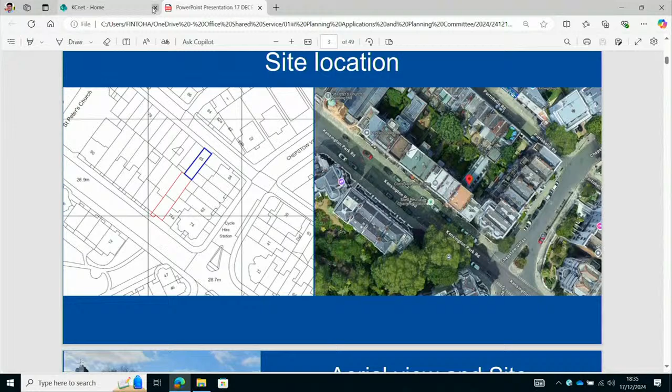So the application site contains a Victorian terrace building set on the northeastern side of the street. The site contains a large rear extension that covers the entirety of the former garden and is linked internally to number 65 Portobello Road to the east. The ground and lower ground floor were in use as a former antiques arcade, and I'll touch on a bit about the proposed use later in the slides.

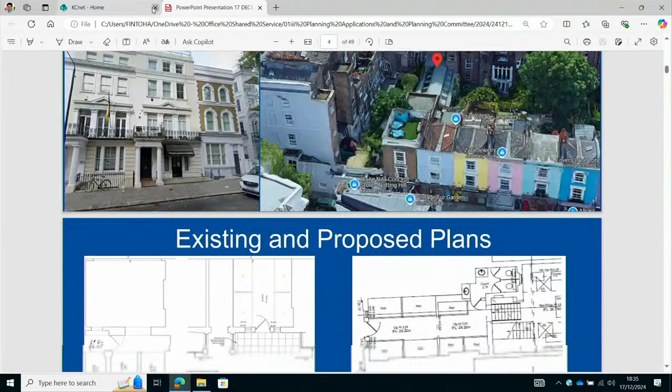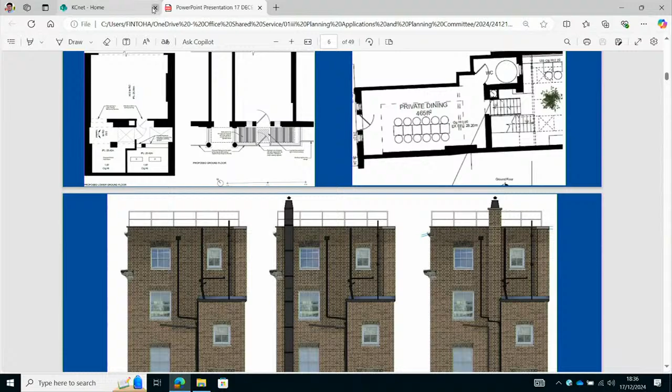Planning permission is sought in this case for external alterations comprising the removal of hard standing, which currently conceals the front light well, and its replacement with pavement lights and walk-on metal grills. Also proposed is the installation of air conditioning units and equipment featuring acoustic louvres, and the installation of a kitchen extract and flue set within a brick slips clad enclosure.

The proposed works are required as part of the conversion of the premises to a restaurant. This change of use would not require planning permission and is not part of the current proposals.

It is noted that the previous application for the site was refused, and dismissed at appeal. The main reasons for the refusal relate to the design and appearance of the rear flue. This slide provides a comparison of the existing, refused, and now currently proposed rear elevation.

The officer has concluded that the proposals have now overcome the previous reasons for refusal related to design, and would continue to preserve the character, appearance, and significance of the wider conservation area. The officer has also concluded that the proposed development will continue to ensure good living conditions for occupiers of neighbouring dwellings. This concludes my presentation, and I'll be happy to take questions in due course.

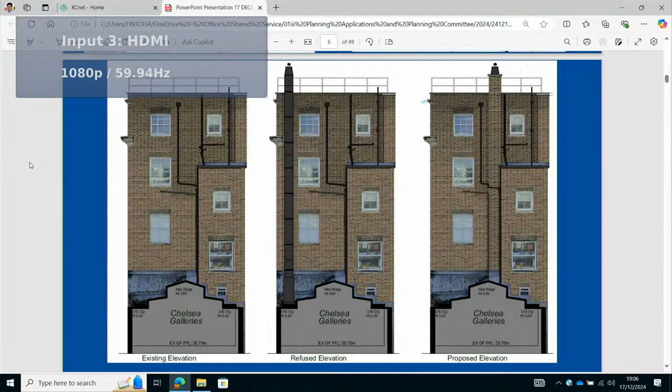Just to confirm, are you referring to this image? No, there's a photograph, it's on the page where those three images are in our packs, not the presentation. It's labelled as photo of existing rear facade. Bear with me a minute while I find that. There aren't any page numbers. If you go on to your first or second slide in the presentation, second slide.

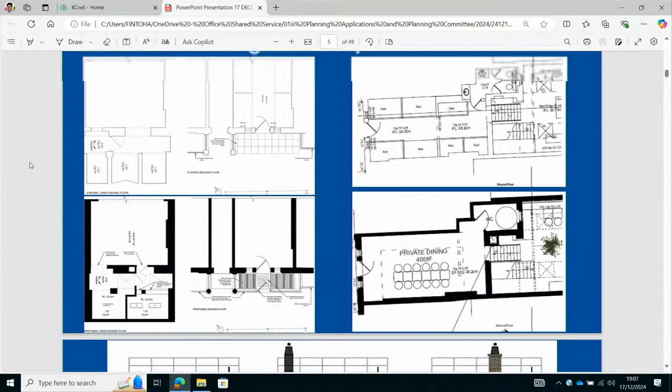Is that the top photo, top left? Yeah. So I draw your attention to the chimney stack on the building to the left, which is painted white on the front, but the right-hand side is probably original brick. Then the set back one, halfway along inward from the butterfly roof, would be the existing chimney stack with terracotta pots on top.

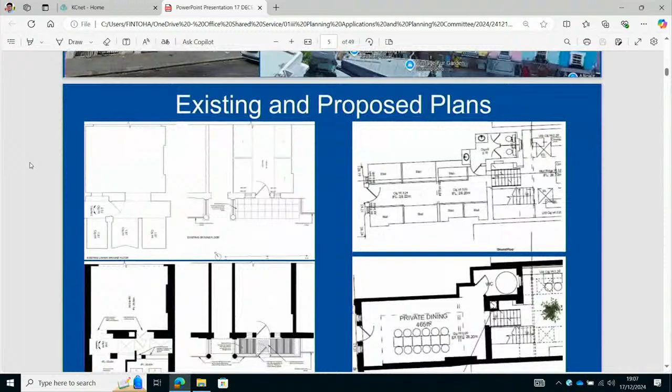I'm just wondering about the height, because we've heard from the objectors that it's higher than the existing original ones. Well, looking at that image now, you can see the railings sit slightly below the top of the chimney pots. If I refer back to the rear elevation, this would also sit just above the railings. So based on that, it looks comparable. Again, I don't have exact dimensions, but it does look comparable to me in terms of height.

And this one here? Yeah, that was my understanding. Thank you. Sure, no problem.

And then you asked about impact on the conservation area. Yes, please. A few important points have been made already around the differences in the previously refused scheme and the currently proposed one. While I still have this image up, you can see the middle elevation is the refused scheme, which has the exposed flue located on the left of the building when looking from the rear, whereas the current proposal proposes the exact same equipment, the only difference being it's encased in brick slips. The reason for encasing in brick slips, as mentioned already, was to help disguise the flue to some degree and allow it to harmonise better than the previously refused proposal did, which made no attempt to harmonise with the surroundings.

It's also important to note that was the only reason for refusal in the inspector's decision, which is a material consideration in this case. So it's for members to decide whether or not they agree that the efforts made to conceal the flue are sufficient to overcome the previous reason for refusal, as the officer has recommended.

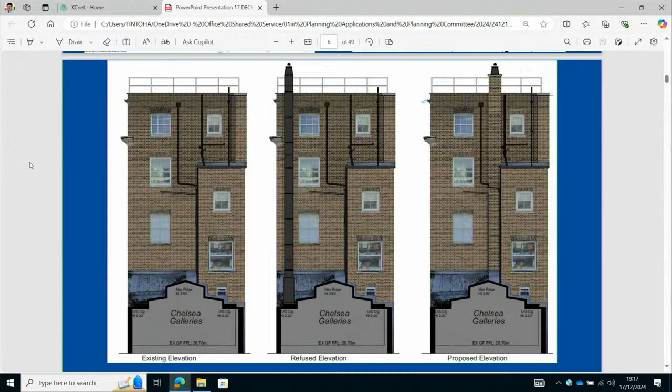Right, in which case we move to a decision. I'm just going to do a show of hands. The recommendation with the change to condition 8 is to grant. Can I see all those in favour? All those against? So that's 3 against, 2 in favour.

So, thank you. Planning permission is not granted.

We need to, could we propose a reason? One of the officers propose a reason. I'd just suggest maybe the same reason as previously, which was considered by the inspector, for consistency. I would say, Chair, that we're opening a can of worms if we let this one through. They're going to get worse and worse and bigger and taller, and covering something with bricks which isn't going to match the original bricks.

Could you propose a reason? So, not in keeping - visually not in keeping. Is that good enough? Yes. Okay, could I have a seconder?

So can I have a vote on that as a reason? Could I see all those in favour? All those against? And I'll abstain on that, so that's passed, 4 in favour. So thank you very much to everyone who joined us for that case.

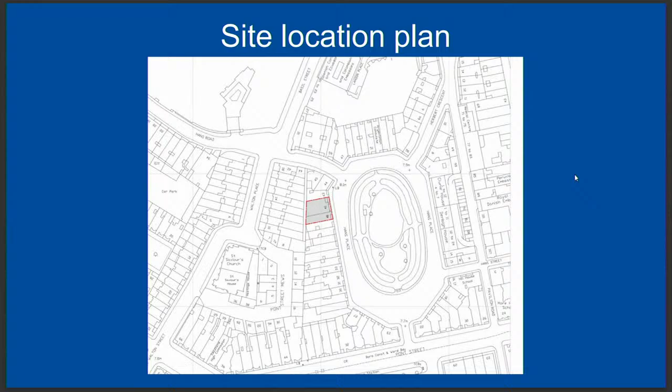Before you is a site location plan showing the 2 properties in question. They front onto Hans Place and have rear elevations towards the properties that back onto Walton Place. Here are some photos of the site. On the left you can see 40 Hans Place and on the right 41 Hans Place.

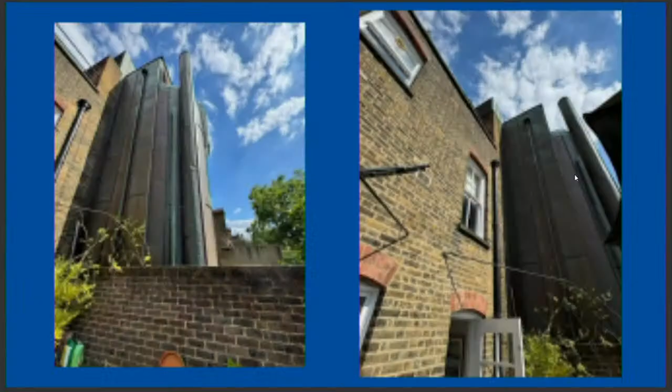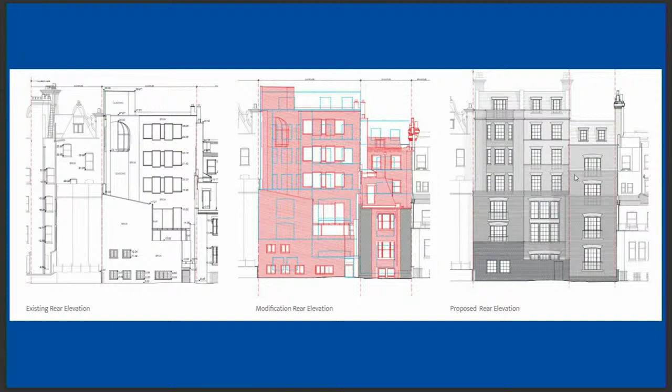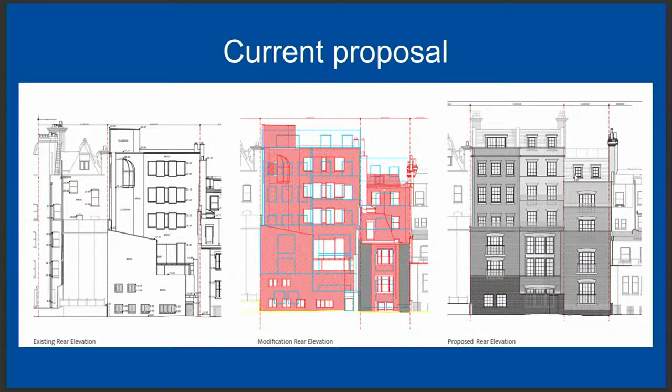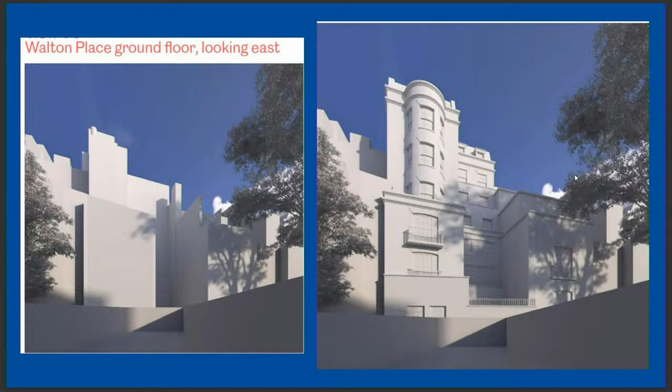These are some visuals of the proposed alterations. You can see that the large extension to the rear is apparent within the gap between the 2 buildings. These are some CGI images demonstrating the rear of the property. And this is the current proposal showing the minor alterations to the scheme, which show a more curved rear elevation on the left-hand side of this CGI image, sought to overcome some overshadowing and overbearing impacts to the neighbouring property.

It's pertinent for the committee members to understand that a previous application was refused by committee on the 10th of September for 6 reasons. Substantial weight has been attached to this recent decision as a material consideration when determining this application, as recommended by officers. The new application was received shortly after, on the 7th of October, and the revised scheme sought to respond to the reasons for refusal.

All of the reasons for refusal are set out in the officer's report within your pack. However, very briefly, to overcome the concerns raised, a payment in lieu of £1,051,635 is to be secured towards affordable housing due to the substantial demolition proposed, which is required to satisfy policy regarding community housing. This is to be secured by a legal agreement.

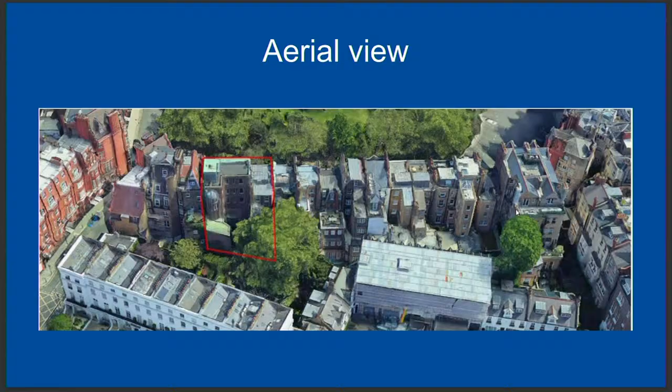And which floor are you on? I'm on the third, fourth, and fifth floors. Third out of five. Yes, that's correct. So, I mean, at the moment, there is a stairwell, a copper stairwell, which is the extent of it—that's about 2.75, I'm looking at. There was a slide taken from the roof terrace showing the rear elevation—there we are, right? Okay, so that's me. Right, and that copper stairwell is the extent of the rear of the property at 41/40.

And that's my back door, and that's the roof. That's the brick wall, and that's it. Now so I can look out across quite an extensive vista, some nice trees, all this sort of stuff that sits there.

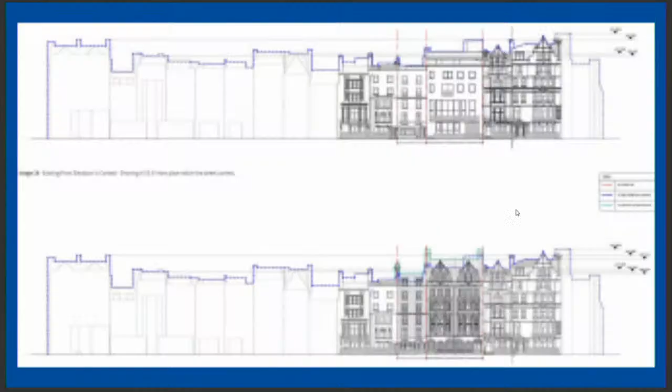The idea is, beneath me, there is no extension. The property is extended only out, I think, to the second floor. So it's one floor below me. The idea is that above that, there'll be another 4 stories, which will go up. I think it is marginally higher, perhaps the same, but marginally higher than the existing copper stair tower.

But it will come out. I think it comes out a couple of metres from where I have just now. So I go from - what did I say it was? The existing building line, I think, is 2.75 metres. I think it then goes to 5.75. The revised scheme is now 5.25 metres. So what I currently enjoy just now is quite significant and goes down, I think, to about 18 inches or something. So it's actually quite small.

But that really is the crux of my point. So sorry, the 5.25 metres - that's how much it's going to extend out beyond your building? Yes, at the moment it goes out. The building line, I think, is 2.75 metres. The refused scheme went to 5.75 metres. The revised scheme here is 5.25 metres. So it goes out a little under 3 metres from what I have just now. Okay, I think that's right.

I'll just give the applicants an opportunity if they want to add or challenge any element of that. But thank you, that's very helpful. Yes, applicants' team, anything you would want to add or challenge on that?

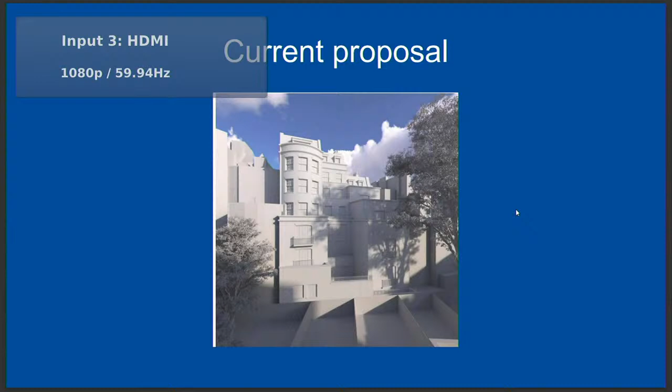Well, I might ask the architect to speak because he's got the dimensions, but the extension beyond where the existing building is, is 1.4 metres, not the figure that's been given. And then there's the curved section of the bay window.

Okay, well, I think we'll take up this point with officers in the next section, just to try and get a bit more clarity. But anything else you want to add on that point of the sense of enclosure?

I think I probably said it. I think, because it's high up on the building and because you've got a nice view across and over buildings, the sense of enclosure, in my judgment, there is some loss of outlook, but the sense of enclosure is not unacceptable in that view, given its position and the cutback that we've made.

Okay, understood. Thank you, colleagues. Any other questions? No. Oh, yep - just in the nick of time, Councillor North.

Could I just ask the applicants, the original features in number 40 which are going to be retained - enhanced? Could you flesh out something like that? Since he is here, Stephen Levrant is our historic buildings expert, and I'll ask him to answer that.

Yeah, number 40 has undergone quite drastic mutilation in the past. These things happen to these buildings, but it is actually an interesting building because it relates to the previous Georgian character of the square, and that's why we wanted to keep it. And we want to reinstate that, because the scale, the quality, the brickwork - everything else is something that should be preserved as part of that previous scheme that existed when the square was built, before all the leases ran out.

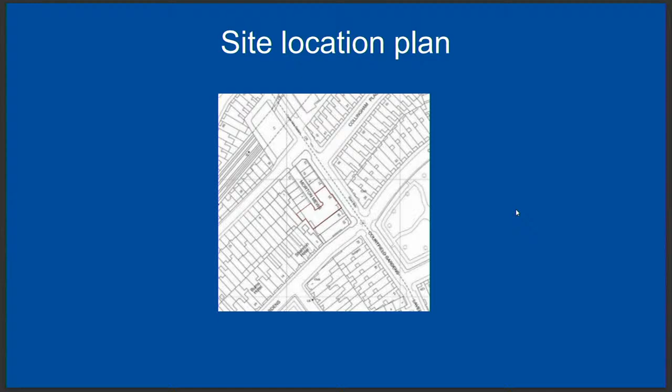So the proposals include replacement of plant equipment on roof. This includes the removal of some units and the addition of some other units, as you can see between these two comparative plans. The installation of an acoustic screen at roof level to the front of the building, measuring 1.9 meters in height. The replacement of a guardrail at roof level to the front of the building, and installation of balustrading to the sides of the building.

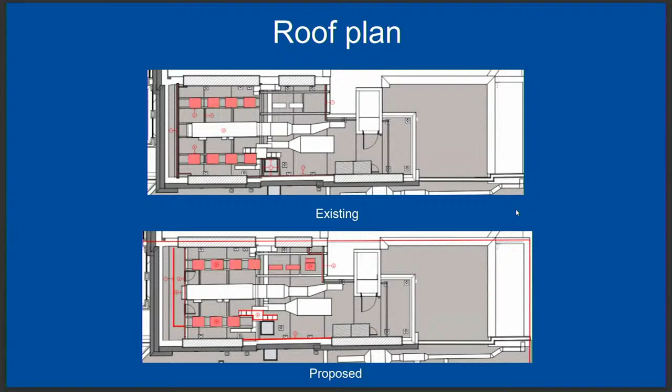This is the front elevation. You can clearly see here the incorporation of that acoustic plant screen. It's set back from the front of the elevation in line with the two existing chimney breasts, and then there is some balustrading to the front of that for the provision of access for maintenance.

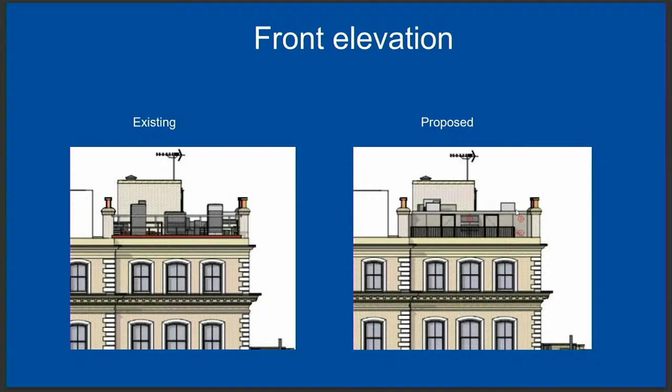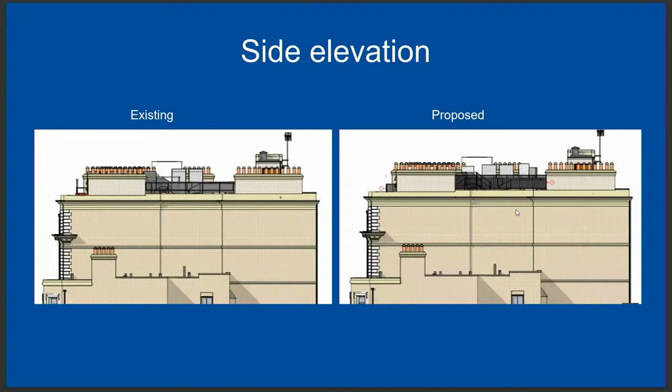This is the existing and proposed side elevation. You can see the incorporation of the balustrading to the side and the front there, and you can also see the removal of one of the large extraction units to the front, and then the installation of some more extraction and AC units to the rear part of the building roof.

This is the existing and proposed side elevation. And that concludes the end of my presentation.

The application has been supported by an energy assessment and a noise assessment, and both have been found to be compliant with policy. There would not be excessive noise beyond that of the existing background noise levels, and environmental health officers have reviewed and are happy with the proposal subject to the conditions listed within the officer's report.

The design is considered to be acceptable, and there wouldn't be harmful impact to the character of the street scene or the conservation area. Officers recommend approval of the application subject to conditions. Thank you, Chairman. Thank you very much.

Right, we have one applicant and one objector. Councillor Verboven, registered to speak in objection. Councillor Verboven, you have 3 minutes whenever you're ready.

Thank you, Chair. I'm speaking on behalf of the Courtfield Gardens and Morton Mews Residents Association. For years, many residents have faced significant issues with the air conditioning system at the resident hotel.

The current installation was not linked to any planning permission, making it essential that the proposed installation is treated as a completely new system. It must fully comply with all planning and environmental standards and ensure there is no nuisance to residents. The first request from the residents is that acceptable background noise levels be defined in absolute terms, not relative to current noise levels.

The association requests that noise levels measured at the new installation at full power must not exceed 28 decibels, in line with environmental policy requirements. This is the same limit recently imposed on the neighbouring property at Barkston Gardens.

Furthermore, this limit must be strictly enforced, with a requirement that the system be immediately shut down if outdoor noise emissions exceed the threshold. To ensure compliance, the residents also request yearly maintenance and noise measurements conducted while the system operates at full power. The second concern is vibrations caused by the system.

To address this, we strongly urge the entire system to be fully enclosed. The proposed partial noise enclosure, which only covers the road-facing side, is inadequate. A partial enclosure will merely redirect noise towards the residents and fail to address the noise and vibration issues effectively. A full enclosure is necessary to safeguard residents' living conditions.

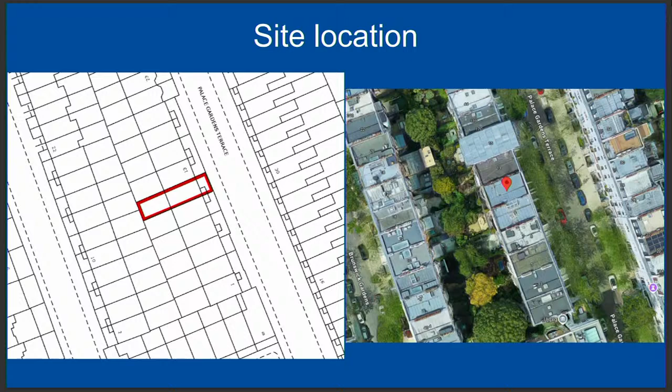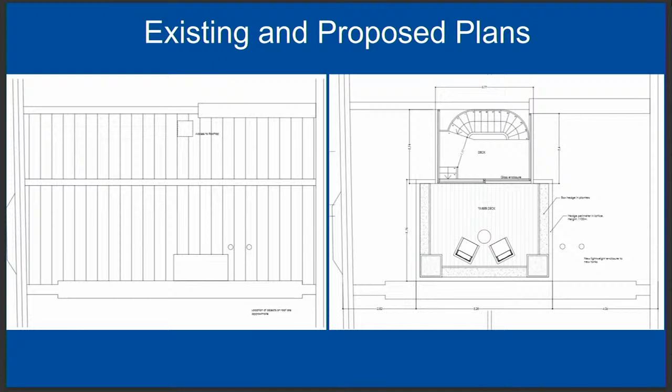This image provides a context of the front to the side. Planning permission is sought in this case for alterations at main roof level, consisting of the creation of a terrace, provision of planters, and the installation of a glazed roof access housing. The proposed terrace would be set back 2.7 metres from the front and 3.4 metres from the back.

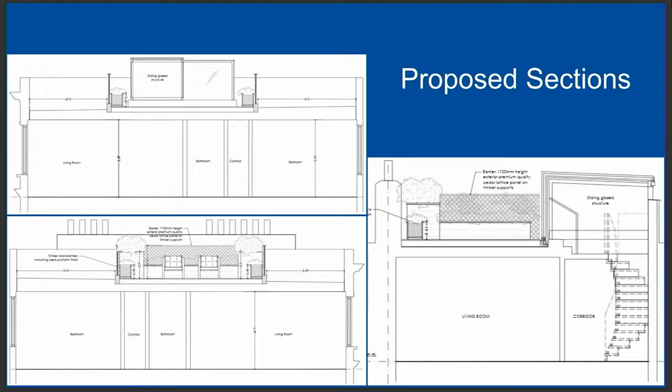As such, the officer has concluded that it would have limited views and would safeguard the living conditions of those living nearby. It is noted that planning permission was granted in 2018 for a similar roof terrace at number 15 Palace Gardens Terrace, which is a material consideration for determining the current application. That concludes my presentation, and I'm happy to take any questions in due course.

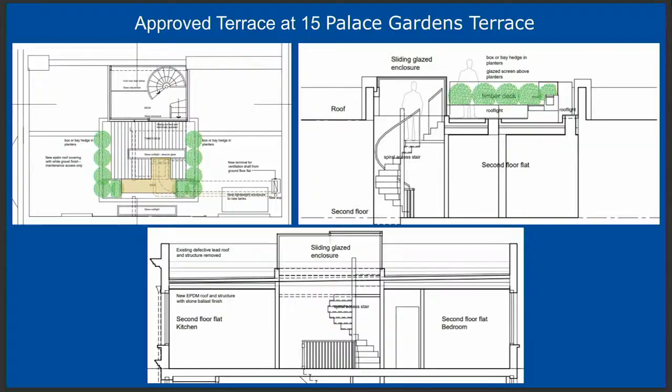Thank you very much. So we have a speaker on either side of this case. So we're joined by Mr. Moshenson. Excellent, switch this on. Okay, fantastic. Well, thank you for joining us. You have 3 minutes whenever you're ready.

Thank you very much for giving me the opportunity to address you. For myself, I own the garden flat, and there are 2 other tenants in the building. The application went in from the top floor without any consultation or notification to the 3 of us. The applicant does not, in fact, own the roof, and he also would need consent from the freeholder, which is all 4 of us, to carry out this work.

And that noise travels down the 2 streets. It's got nowhere to go, so it moves around the street, and it can be extremely intrusive. Sometimes people call the council for help at night. Other times they call the security guards that have to be there at the moment because we're plagued by people either breaking into houses or driving off in other people's cars.